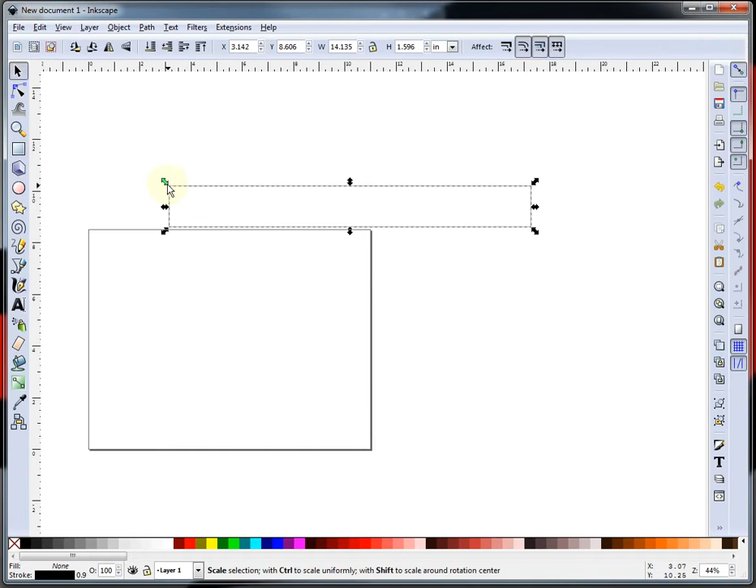Today we're going to draw a small end table. I'm going to do the side view of a small end table, and when I use Inkscape, I just draw random size rectangles to start with, and the thing about this is we're going to be drawing at full scale. So this is my 8.5 by 11 sheet of paper. I'm not going to be using that. I'm going to use this.

This is my tabletop. I'm going to go up here and set the width, and I want it 25.5. So that's 25.5 inches long. And I want it 1.5 inches thick. So now I have my tabletop, and we're not going to worry about fancying it up right now. This is just a basic how-to.

Next thing we need are some legs. So of course just another random size rectangle, and the height on that is going to be 19.5, whichever way you care to look at it. Whoa, what did I do there? Height 19.5. And we'll go with 2.25 inches thick. 2.25. There we go. And I'm going to put a small taper on this.

So when I do a taper, this is where you've got to pay a little bit of attention, because they're basically all boxes. So I'm going to draw a box, and this is going to be my taper. I'll show you how this works. I'm going to make it 0.25 wide. No, I'm going to make it a 1/2 inch. Sorry about that. I'll make it 0.5 wide, and I want it 2 inches tall. And you'll see what I'm getting at here in a minute.

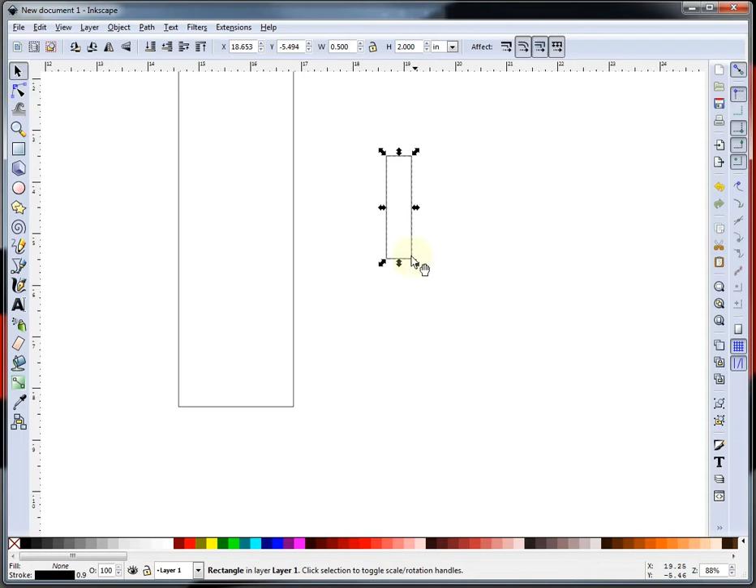So I'm going to snap this to the corner. I'm going to click that, hold my shift key, and click on the outside box. Now I'm going to go up to Path, Difference. And it's going to cut that notch out of the size I just did. Now I'm going to double click on this, and you'll see these nodes. Well, you'll see 4, but on this one I'm just going to select it and hit delete. That gives me this kind of weird shape.

Now I'm going to box around these 2, or you can do them separately. You can click one, hold the shift key, and click the other one, or you can box around. And I'm going to go up here and make this a straight line. See, it says make selected segments lines. Boom. There. Now I have a nice little taper at the end of my leg.

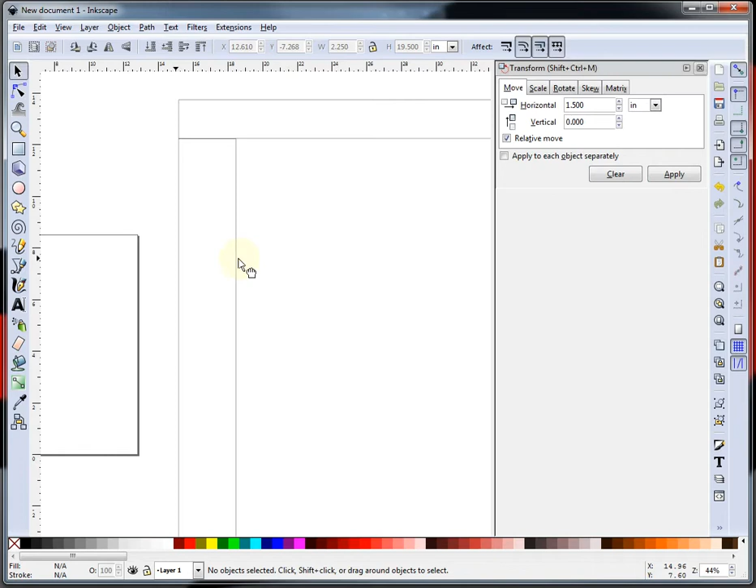Now I'm going to put my leg right up here on the corner. I'm going to just snap it on there, because I do have my snaps turned on. And now we're going to go to Object, Transform. With the transform on, I'm going to go to the Move tab, and I'm going to move it horizontally 1.5 inches, and you'll see the little arrow, and I'm going to hit apply. And then I'm going to copy this leg.

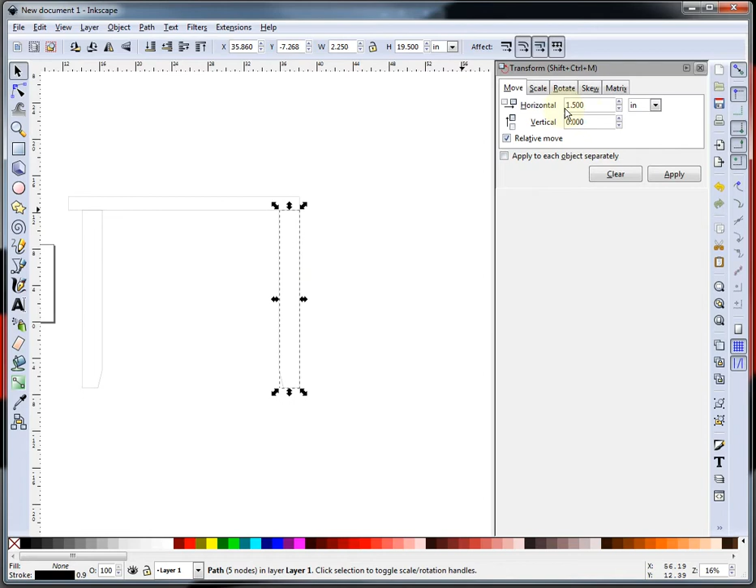I'm going to select the leg, hit Control C, Control V, and I'm going to do a mirror, which is this up here. It says flip selected objects horizontally, which is a mirror. And I'm going to snap it to the corner, and now I'm going to change this to minus 1.5. Put a minus in front of there, and hit apply. And there. Now I have my legs, 1.5 inches inset from both sides.

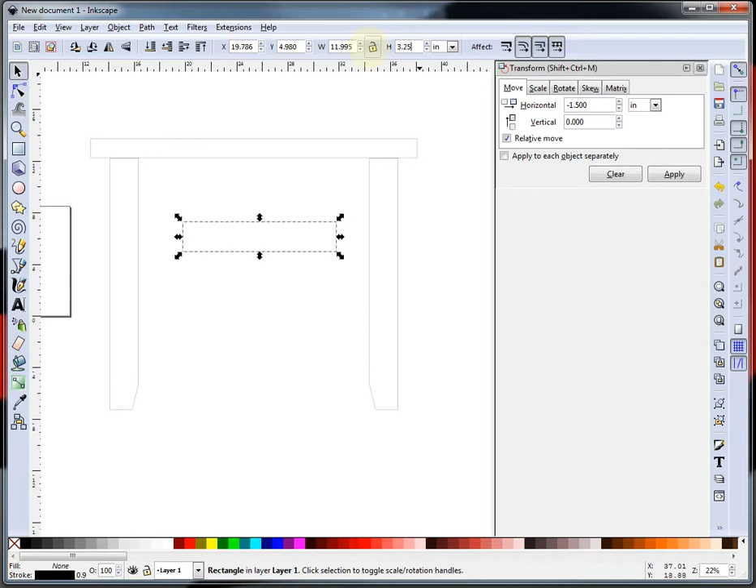Now I'm just going to take a board here, and this is what my idea was here. So I'm going to make the height 3.25. I'm going to go ahead and snap that in the corner. And then I'm just going to bring it over here till it almost touches. And now I'm going to hold my control key and use my scroll wheel to zoom in, and just make it so it touches.

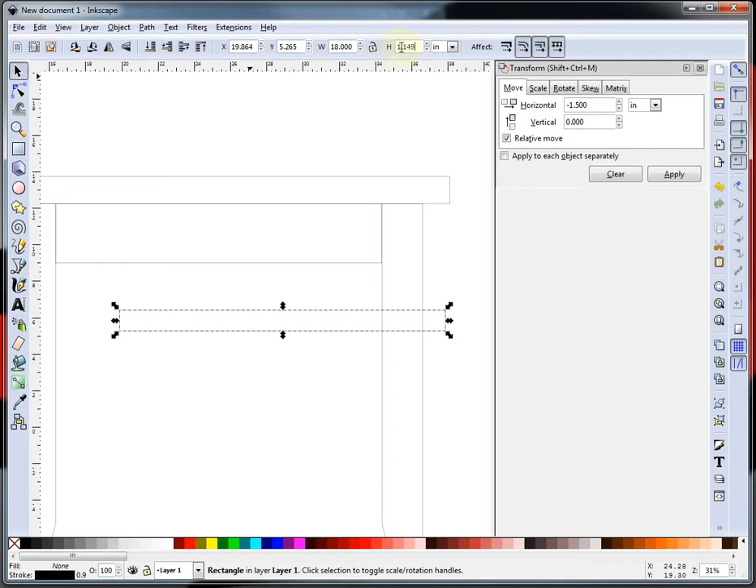It should be 18 inches, so we'll just make it 18 inches. And there, it should be about perfect right in there. Yep. Now I'm going to add a little detail here, which is going to be 0.5 wide and 18 inches. Oh, got those backwards. It's going to be 18 inches wide and 0.5 high. Now I'm going to add it right there. That's just a little extra detail. You would see that on the other side drawing or a separate piece part drawing, but this is just the basic table drawing.

So now I'm going to copy this one. I'm going to select it, hit Control C, Control V, and I'm going to make this one 1.75.

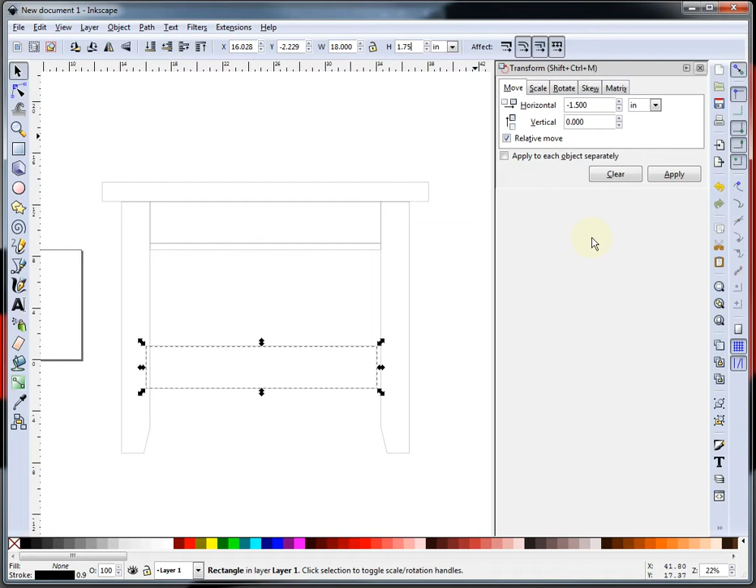And I'm going to go ahead and put it there. Now you'll see it snaps to the corners. I want to move it vertically this time, and bring it up 3 inches. I'm going to select it, then hit apply. And there, now it's up 3 inches from the bottom.

Now I'm going to add some extra pieces in here. These are 1.75 wide, or 1 3/4 inches wide. I'm going to get it dimensioned here. I think it's supposed to be 11 inches, which it is, so I'm just going to make it 11 inches high, which should be right there.

I'm going to take it and pop it in the corner there, and then move it horizontally. 2.75, 2 3/4 inches. I'm going to hit apply. First I need to select it, then I can hit apply. I'm going to come over here, Control C, Control V, pop that in there.

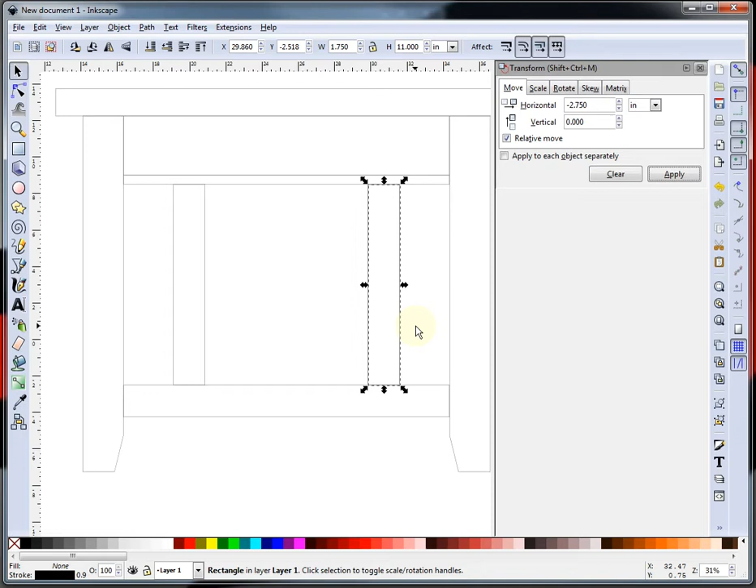I'm just going to put a minus in front of this and hit apply. Then I'm going to hit Control D, and hit apply again. Then I'm going to come over here and hit Control D, which is duplicate. It makes an exact copy of what you've selected and places it right on top. Then I'm going to get rid of the minus and hit apply.

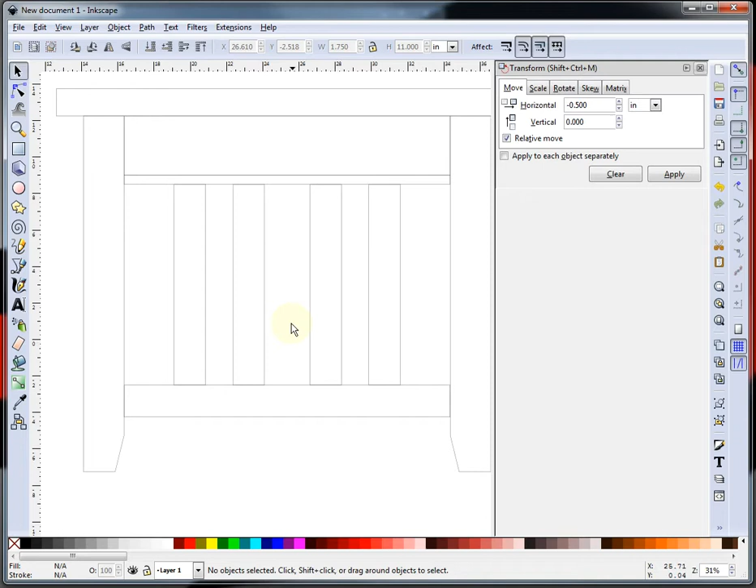Now, that don't look right, so I need to move this over just a bit more. I'm going to move it over 0.5 and hit apply. Then I'm going to make this one, move it over minus 0.5, and hit apply. They probably should be in a little bit more, but we're just going to leave it at that for now. But that's how you would design a basic table.

It's quick, it's easy, and I don't know if I got time in this video. If you get bored with it, kill it, but I'm going to show you how to do the measurements.

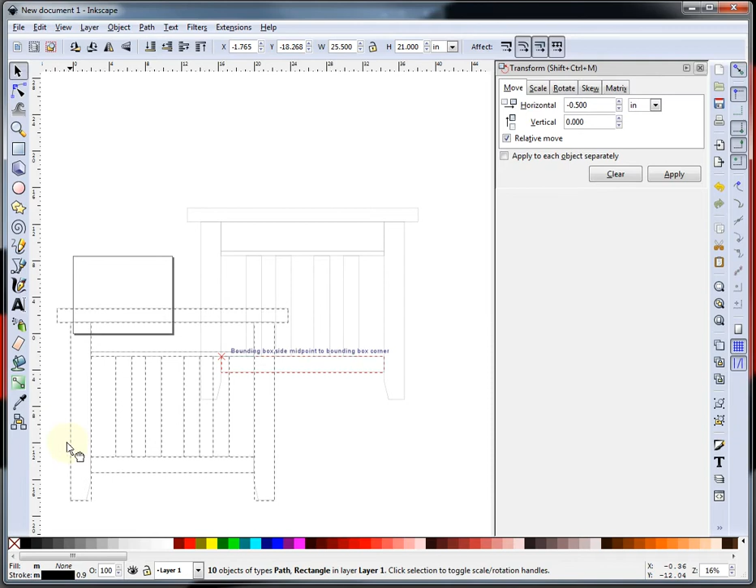What I would do is copy this whole thing, Control C, Control V. I'm going to drag it over here a little bit, then go to scale. The scale usually starts at 100. I'm going to put it down to 25% of both, and check the box that says scale proportionately, so it scales everything like it's supposed to. Then I can pop it right here in the middle of my actual sheet of paper.

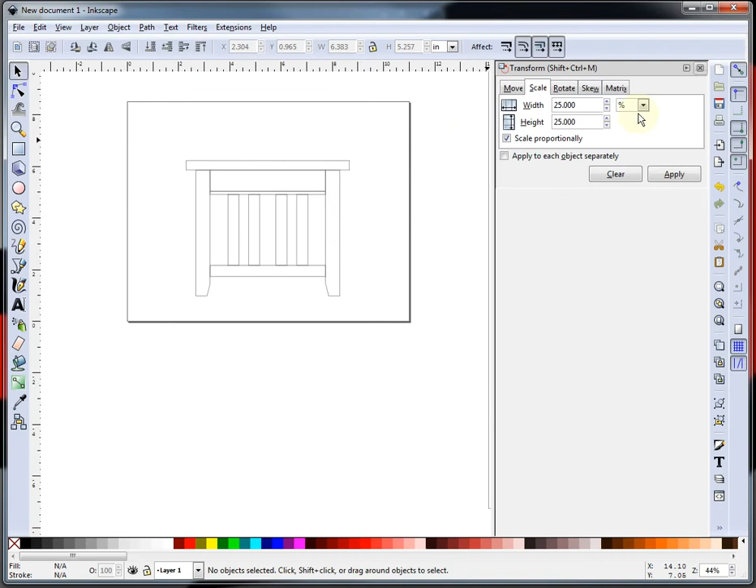And I'm going to get rid of this. I'm going to go up here and select extensions, visualize path, and I want the dimension tool. You'll see I have the tabletop selected. I'm going to hit apply, and it's going to give me the arrows. The people that work on Inkscape are working on this part of the deal, but they haven't got it yet. So you go back up to extensions, visualize path, and go to measure path.

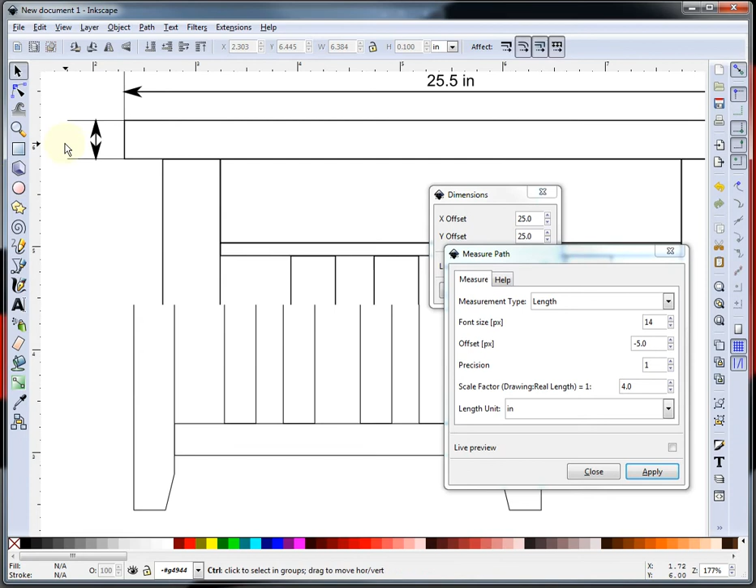This brings up another box, and when you first select this, it'll be all selected. Just double click and you'll get just the arrow. I scaled it, factor 0.4, or to 4, because I scaled it 25%, which is 4. So it's in inches, and I'm going to hit apply, and it gives me 25.5 inches, just what I drew on the other side. Same thing with this one, hit apply, and it's 1.5 inches.

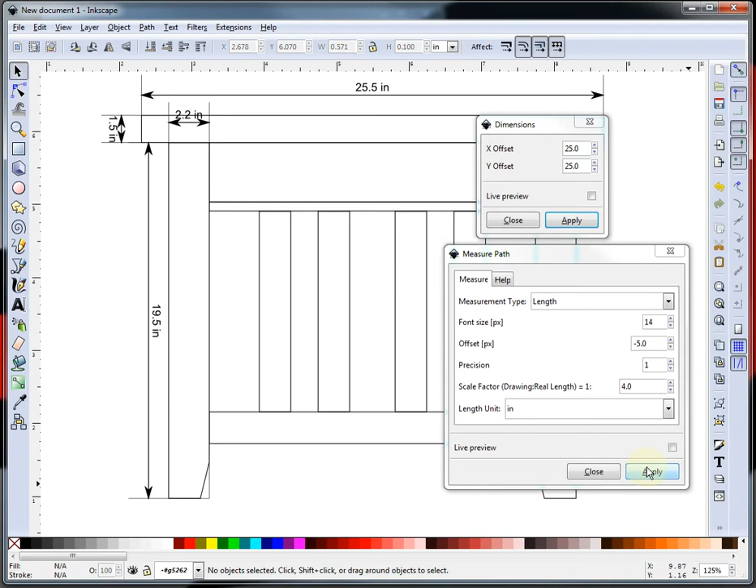And I can just take this and maybe move it to the other side if I don't like it where it is. Then I can just take the leg, do the apply, double click, get the arrow, hit apply. It's 19.5, just what I wanted. And the side, hit apply.

I'm going to take this and this, and move it down here. Oops, I missed this one. So I'm going to move it down there. Whoa. Control Z, Control Z. Remember, Control Z is your friend.

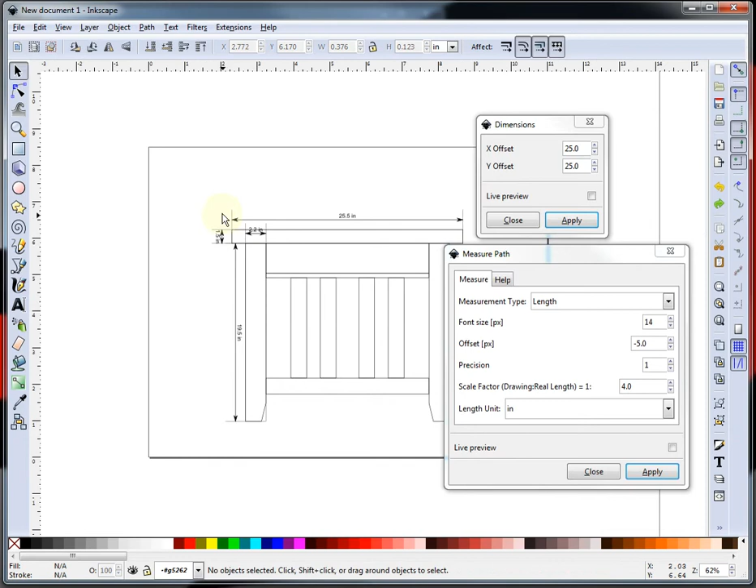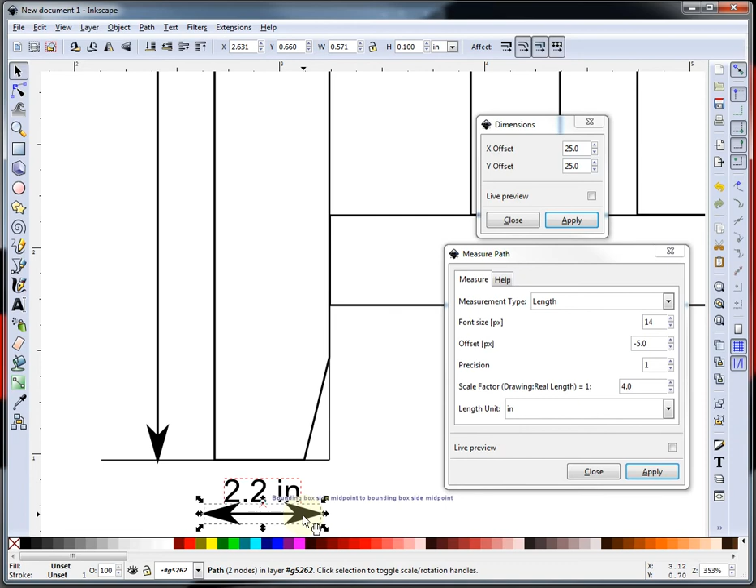So I select the arrow, hold the shift key, select the 2.2, which is not supposed to be. Pop it down here. Excuse me, having a rough time here. Bring it down here. Because it wants to snap to the box, that's what's happening. So that's why it's doing that. It wants to snap to itself all the time. Bring that down here. Yeah, and see, now that measurement didn't turn out quite the way I planned.

So I'm going to have to go with a precision of 2 and hit apply. 2.24 is supposed to be 2.25. Okay, sometimes it gets a little quirky like that, but you know, you can just keep doing that on the whole thing, and it'll tell you what your dimensions are.

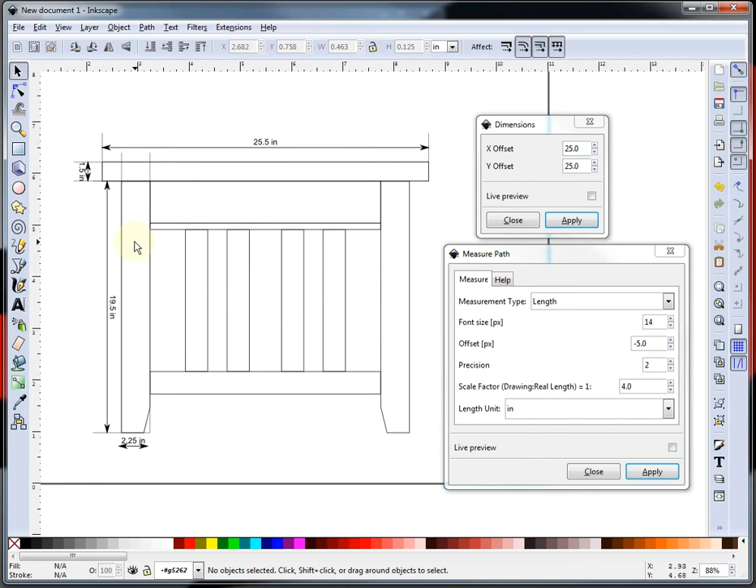So I hope you found this interesting. Hope you found it helpful, useful. But with just a few simple things you can do with just the rectangle tool, and then a few other little tips and tricks, you can design a table.